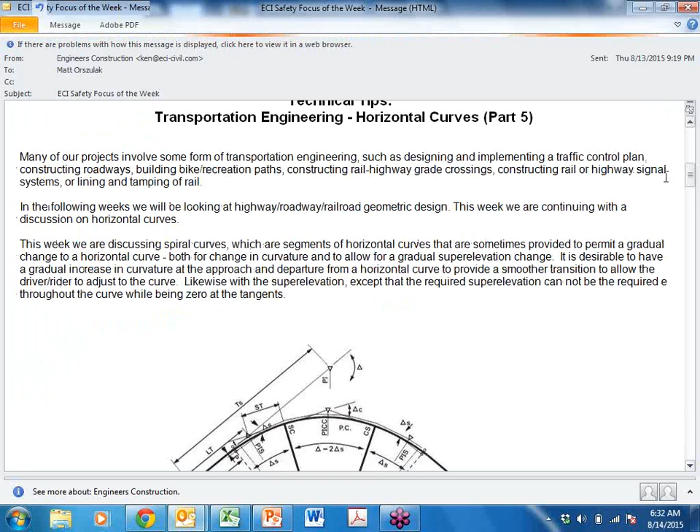So technical tips here. We've been talking about horizontal curves in transportation engineering, and we do a lot of curves, whether you realize it or not. In fact, in Berlin we've been doing some... Gary's got a headache, his head's exploding from the thought of curves and super elevation. It's so intense on that job.

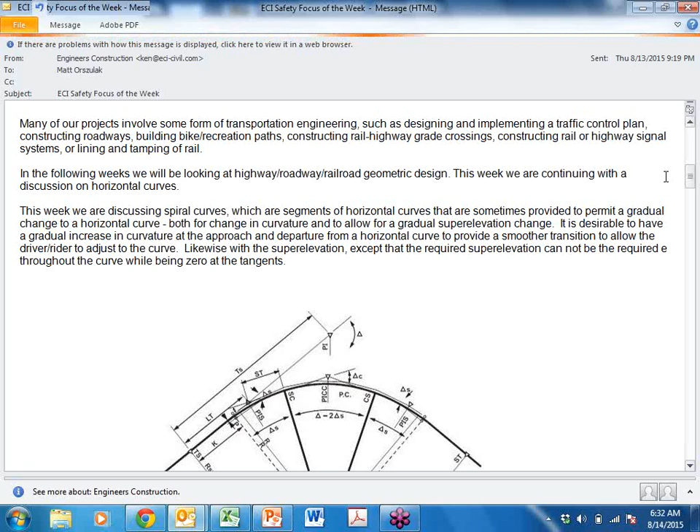But anyway, we've been talking about horizontal curves, and last week we talked about super elevation and how with a horizontal curve you match a super elevation to that curve. Now if you think about it, you come into a straight tangent, you don't have any super elevation. You typically crown the road, and you transition to that super elevation. So the transition, especially going right to a horizontal curve, would be difficult.

So they have what they call a spiral curve often at the beginning and end of the curve. That's where the radius changes, starting out at an infinite length at the tangent end and then shortening up to this radius. And what that does, it allows you to have a gradual super elevation change into your curve.

It's called a spiral. A spiral, I had to look up the definition myself - a spiral is a curve that starts at an infinite radius, very long on that tangent, and then changes. And a nautilus, remember the nautilus shell? That's one of nature's spirals. It goes big and then tighter and tighter and tighter, and a little sea creature lives in it. So same thing, borrowed that from nature, use it for horizontal curves.

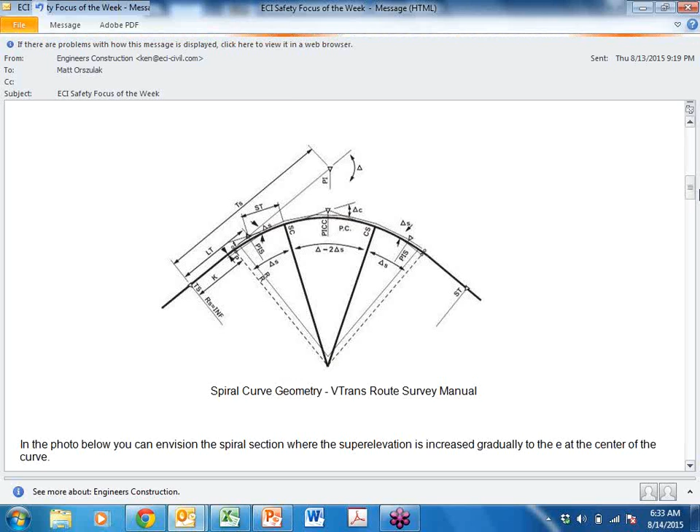I showed the same pictures we had last week. It's obviously difficult to see actual spirals, maybe from a good aerial view, but this does show the super elevation, and you could tell that on the tangent section the tracks will be level, and then there's a transition. Obviously, especially on railroad, you wouldn't want it to go like this - it'd be quite a bump. So you have that transition through the spiral.

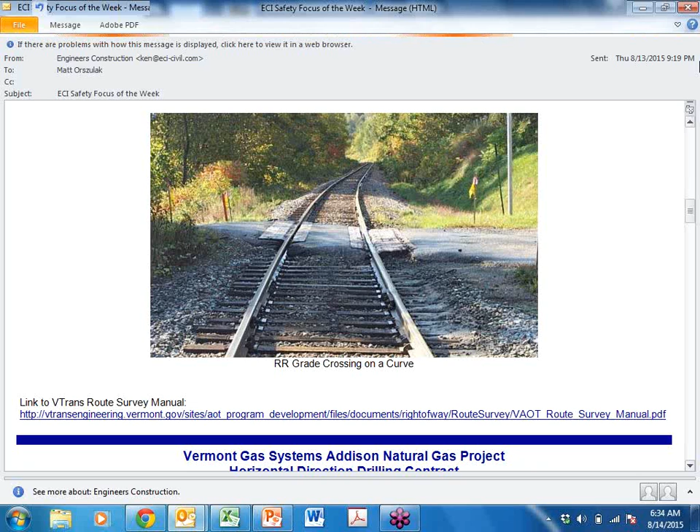And I attached a link to the VTrans Route Survey Manual, which is actually where I took that from their manual. It describes layout and survey for curves and everything related to survey.

So this week we're profiling the Vermont Gas Systems Addison Natural Gas Project, the expansion transmission line, where we're doing the horizontal directional drilling. There's a total footage of around 21,000 feet of 12-inch diameter steel transmission pipe, all done by HDD, for roughly 18 drills across the project.

And we just recently started the Essex-Colchester sand plain area with 2 separate back-to-back drills, essentially. We're drilling from the center on one and from the outer on the other, but then we're going to turn the further drill out and we'll be pulling in towards the center.

And this is for the sand plains, a protected area we'll talk about in a moment, and the Indian Brook tributaries that cut through the area.

We're drilling a pilot hole for drill number 1, the longer one at 2,340 feet, with the 330 by 500 maxi rig. The drill has a maximum thrust pull of 330,000 pounds, with a torque of 50,000.

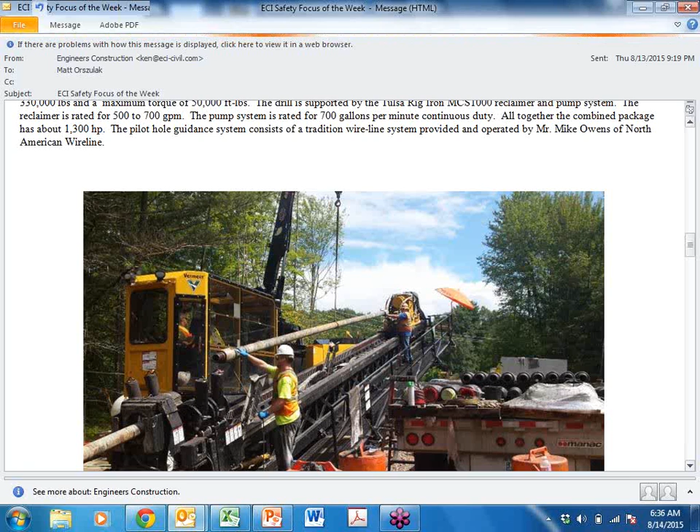The pilot hole guidance system consists of a traditional wireline system, provided and operated by this guy Mike Owens, a subcontractor. His company is called North American Wireline.

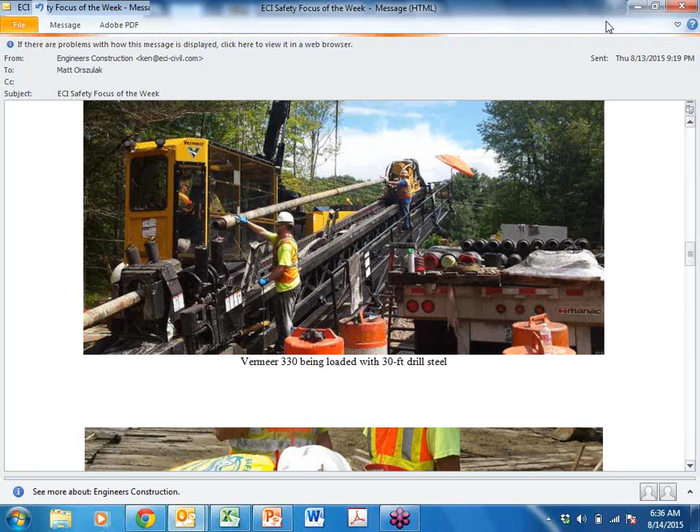And here we are putting a section of steel up. Unlike our other drills, you manually load the steel off of a trailer with a boom on the machine, drop it in, and then it's similar to the regular drills we're used to. This is roughly a 30-foot long steel, though the length varies.

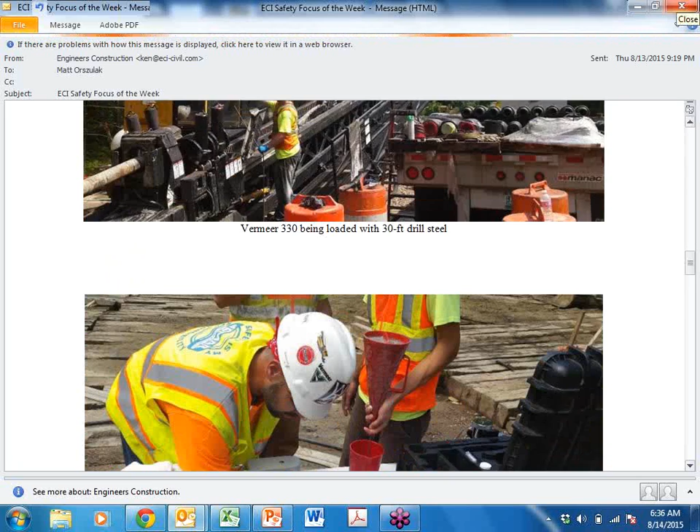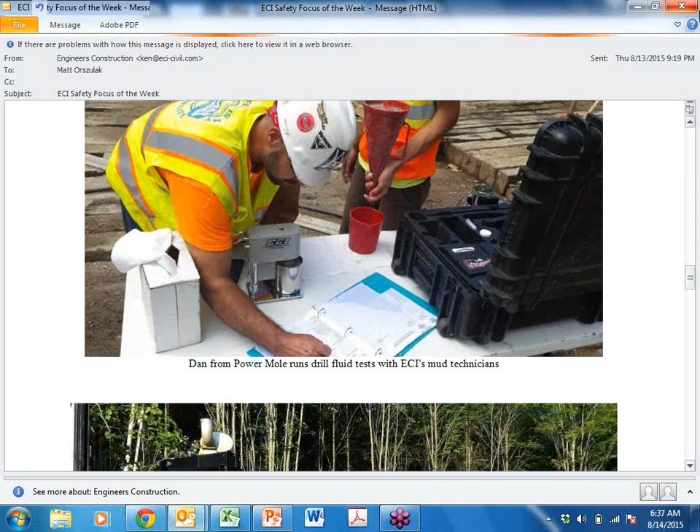Here we're doing some of the fluid tests: the plasticity, plastic yield, plastic viscosity, and yield strength, and a marsh cone test. This guy Dan here is from Power Mole - he's a mud guru.

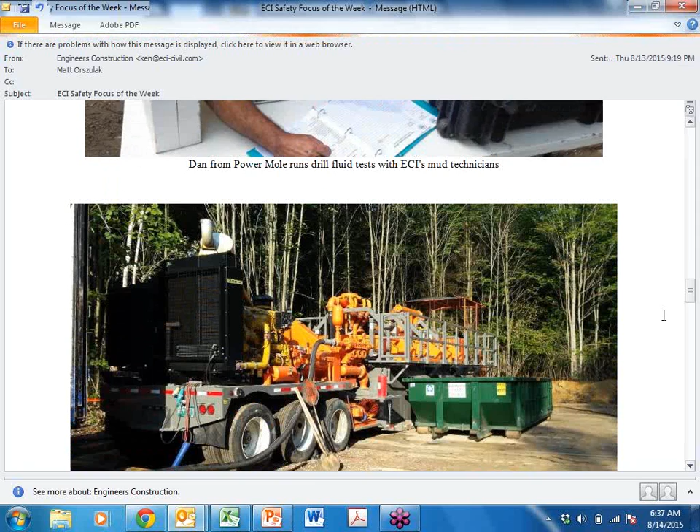There's the Tulsa rig. It has two engines - one for the main pump right there, and on the far side, there's a generator running all the electric pumps on the reclaimer.

On drill number 2, which is further towards Route 2A, we're drilling the 1,700 foot bore with the 40-20 all-terrain, starting out as a rock hole. We anticipate it'll get out of the rock at some point, and then we'll finish with a different drill. We're also using a walkover guidance system, the F5 DigiTrak.

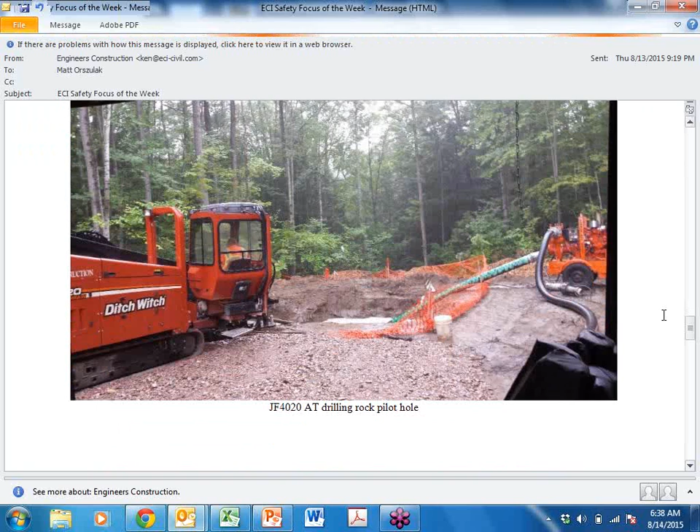This is for setting up the 2,300 foot long section. It'll be done in 3 pipe strings, I believe. And the sand plains - what's that?

I didn't know really about sand plains until this project, but it's an ecological environment in the Burlington, Essex, Colchester area. It consists of sands, as you'd expect, silts and clay strata deposited during the recent glacial and post-glacial activities around the lower Winooski River Valley.

And of course, during some of the glacial periods, the water was backed up in the lake, and the lake was a lot different and higher.

And remember, there's a whale that was discovered in Charlotte. In case you don't know, there's a whale - I think it was probably 50 years ago or something, maybe during construction of the railroad. It was right near the crossing on Thompson's Point Road - there's a sign, a plaque there and everything.

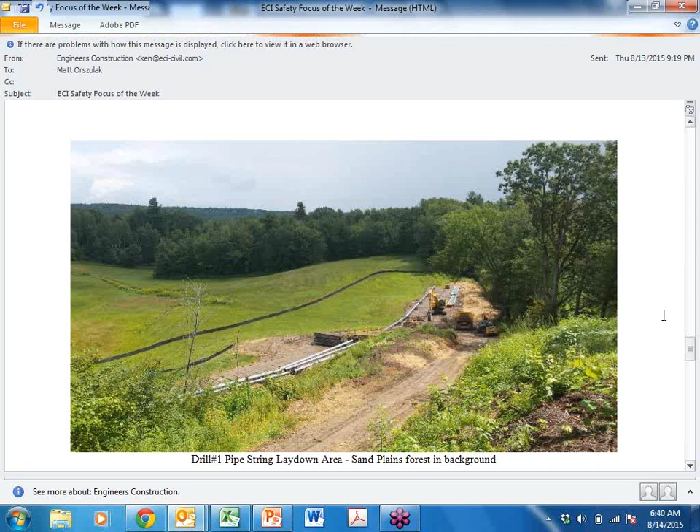So we're drilling around that, and the Indian Brook runs through this whole area. It runs to the lake, must come off from Indian Brook Reservoir somehow. I can't picture where it would cross Route 2A, but Route 2A is off to the right.

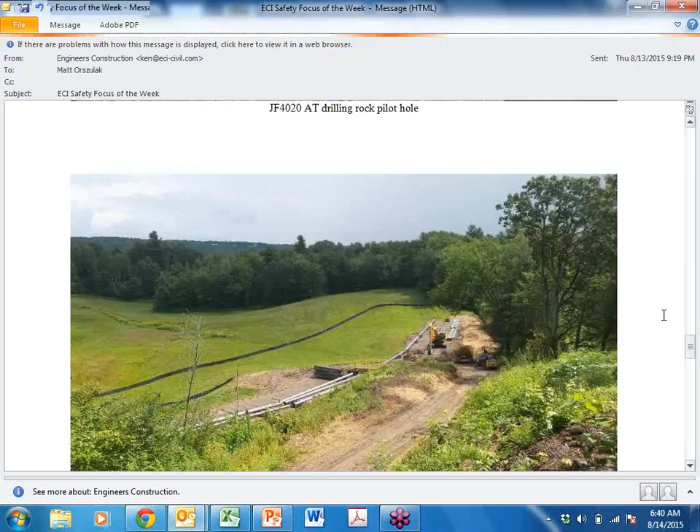Okay Matt, you're going to talk about aerial lifts, right? Yes, I just had a couple basic things, an older blog I just reviewed and freshened up.

It's all about planning, really just on everything. I'm just identifying here that you want to select the appropriate size for the required terrain, prepare a firm level platform when required in advance before it gets there - part of your planning. Bring the proper PPE, including fall protection, and operators should be properly trained.

So, thanks Ken. Yep.

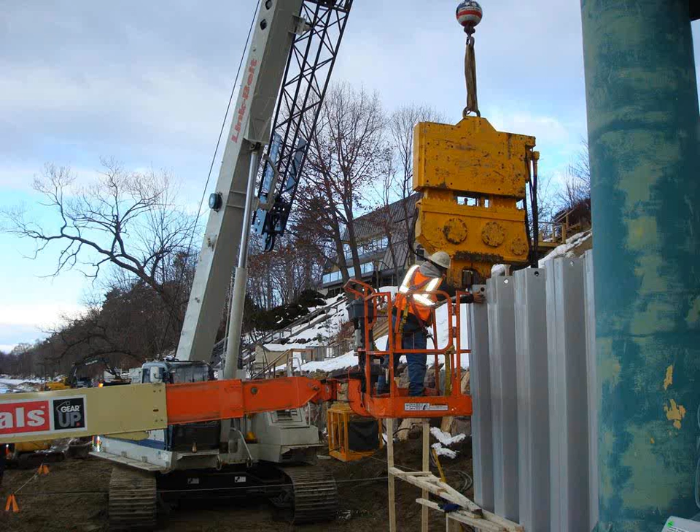We're doing more and more unique style work where we're seeing a lot more aerial lifts on our job sites. Aerial lifts are one of those crossover pieces of equipment, much like our forklift, where we need training and documentation of training. It's one of these tools we've been doing a lot of renting, and we rent them for a job site, and then we're just not quite following through with all the proper training that you need to operate an aerial lift. So I'll go over some of the basic requirements.

One is training. You also need to be authorized to operate an aerial lift. We've got to have inspections being done, always having either chocks or setting the brakes. We do have a boom and basket truck, I'll quickly get into that as well, but also the basket load of the aerial lift itself.

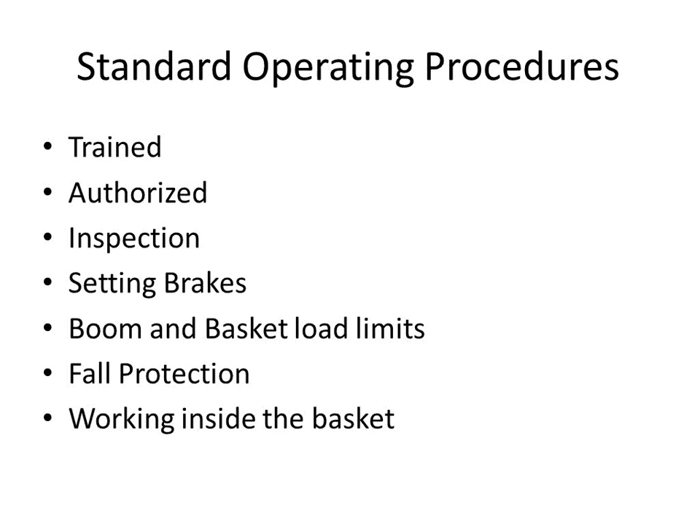Fall protection requirements for an aerial lift, and working inside the basket. This is one of the major catch-alls OSHA compliance officers use when citing companies for working outside the baskets. So we need this training, and the training we're doing today will get you through to operate an aerial lift, but it's just hazard recognition. The hazard recognition is just your surroundings. So with an aerial lift, we have to make sure we're not operating this too close to overhead power lines.

We need to make sure we're always staying 10 feet away with an aerial lift from overhead power. What's your grade of slope? Where are you trying to position this thing? We always want to try to keep our aerial lifts level, on level ground as much as possible, and just be aware of how much movement we're going to have around you.

The biggest hazards with aerial lifts are falling out of the basket, or actually operating it outside its parameters and tipping the aerial lift over, working on uneven ground, having the basket overloaded, extending way too far out, and moving while you're doing all that operation. It creates a very unsafe condition, and that's why they have the alarms.

So when this alarm's going off, it's constantly beeping at you, telling you that you're probably not level and you're in danger of a tip over. Working loads: each basket, depending on the size of the machine, has a different working load limit, and that should not be exceeded.

Same thing with our cranes and our rigging - it usually says 500 pounds. We want to make sure that if we have 2 men in a basket, we don't load up a lot of construction material in that basket as well, because we could overload it. And again, if you stand too far out, there's a chance for a tip over.

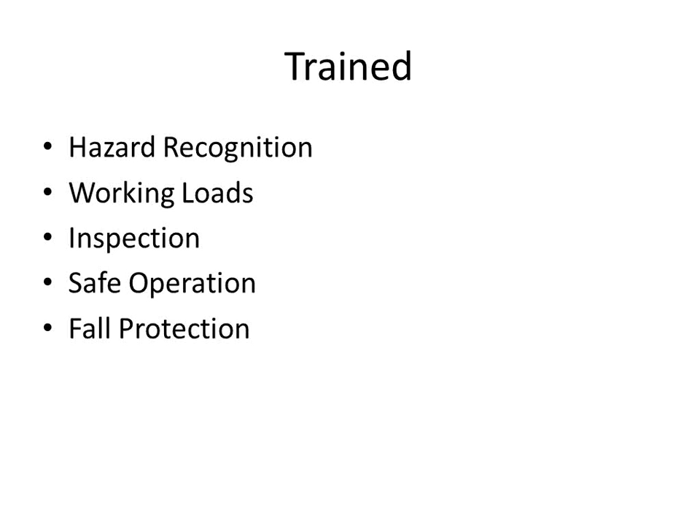And a lot of times you're operating this at multiple different levels. So with a retractable setup, you are always going to be in compliance, making sure that if something does happen and you get thrown out of that machine, the retractable will keep you inside the basket.

So you must be authorized to operate an aerial lift - you actually have to be told that you've gone through the training. A lot of the project managers, or you get the safety department involved, will just go through a training similar to this, making sure you can identify all the hazards and know how to operate it.

We've kicked the tires on the machine and seen you operate it, and now you're authorized to operate an aerial lift. With inspections, lift controls shall be tested each day prior to use to determine that such controls are in a safe working condition.

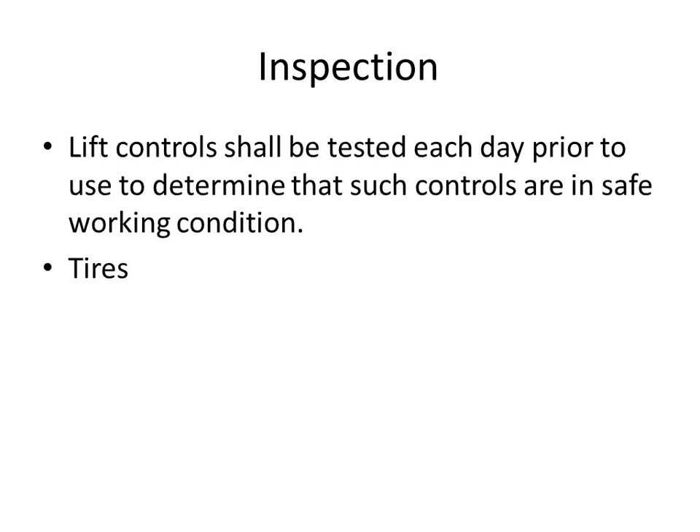Check the tires. Some tires are now solid, but if it needs air in them, that could get you off tilt and not on level ground, so make sure we're checking the tires. Also keep proof of documentation, throwing it in your field book or on the tailboard under fall protection, noting that we've done our inspection of our aerial lift, fall protection as needed, everything's good with the aerial lift.

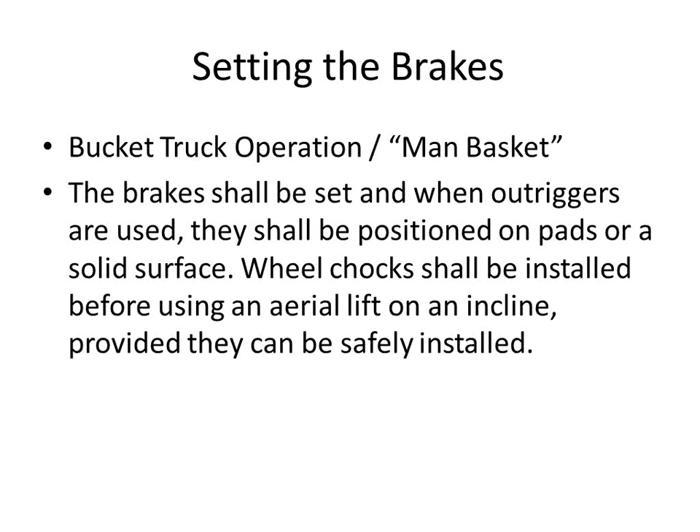For setting the brakes on bucket truck operations and man baskets, the brakes shall be set when outriggers are used. They shall be positioned on pads or a solid surface. Wheel chocks shall be installed before using an aerial lift on an incline, provided they can be safely installed. That's in the regulation. In our bucket truck we need to make sure we're using the outriggers and chocking the tires on our white bucket truck.

Boom and basket load limits specify what the manufacturer allows, and this must not be exceeded and must be legible on the equipment and inside the basket. These aerial lifts are set up similar to our basic ladders, telling you all the safe working practices right on a sticker in the man basket, same as the information on the side rails of our ladders telling you how to operate the equipment.

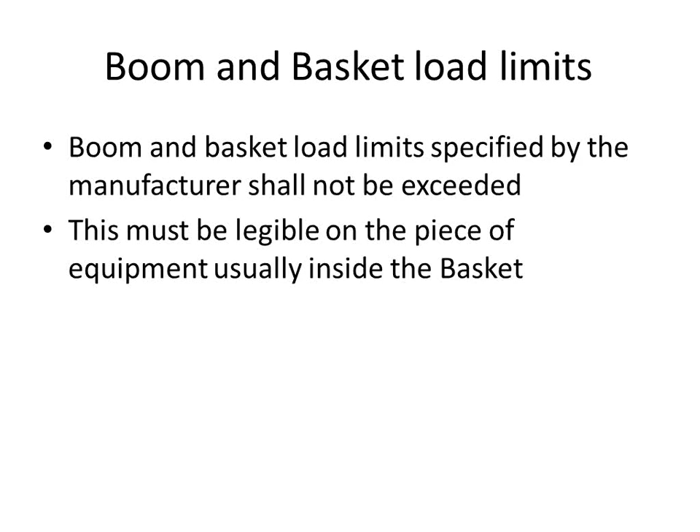For fall protection, the regulation says body belt, but the best practice is a full body harness with a restraint system such as a retractable lanyard. This excludes scissor lifts, which are mobile scaffold and fall under a different standard. A scissor lift is mostly for interior work or working on slabs, whereas an aerial lift is more for uneven terrain, construction material, dirt, and gravel.

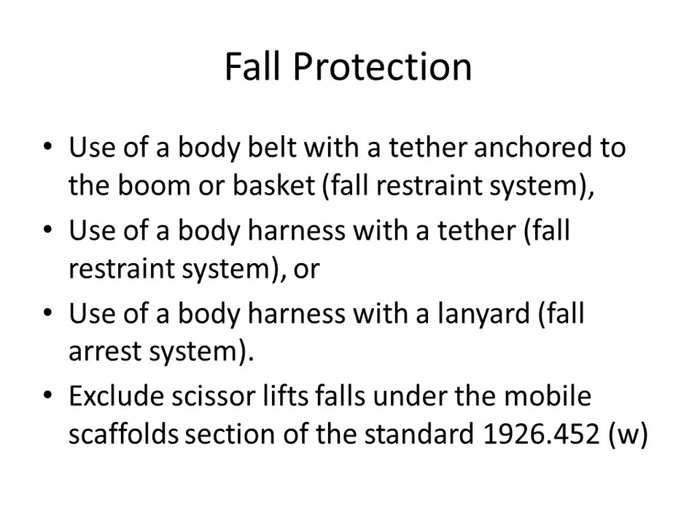Working inside the basket, employees shall always stay firmly on the floor of the basket and shall not sit, climb on the edge, or use planks, ladders, or anything else to get higher. Those are some of the biggest problems we see out there, modifying the baskets to try to reach a little higher or climbing on the rails. We just cannot do that. That one unsafe act could really get us in trouble with a VOSHA compliance officer, so let's make sure we're always working inside the basket on flat, firm ground.

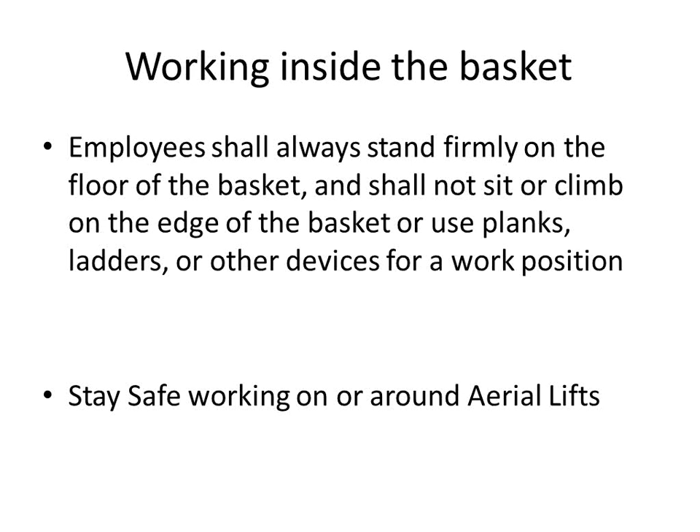Stay safe working in and around aerial lifts. You're working above someone, so operators need to keep all people below you from underneath the aerial lift, especially if you're chipping concrete or anything like that. The last thing we want is construction debris falling onto workers below, so make sure you flag the area or set up a danger zone underneath your aerial lift.

These are all safe working practices we want to keep following as we do more overhead work, crane work, and concrete abutment work. It's become more regular, and we're using more aerial lifts, so we wanted to get this training out to some new hires. It's a good refresher since it's been about a year since we've done this. It's a handy tool, but we've got to make sure we follow the proper protocols while using an aerial lift. Any questions? Thanks for your time, let's have a safe day today.

One thing to consider if we're renting. That's true, okay, all right.